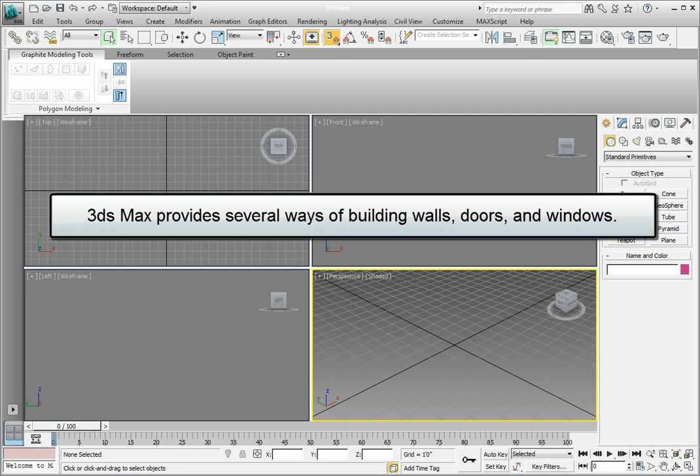3ds Max offers a variety of ways to build architectural objects like walls, doors, and windows. You can build them using traditional modeling techniques, like building from polygons using the graphite modeling tools. Polygon editing is a great way to work if you're building customized walls, doors, or windows.

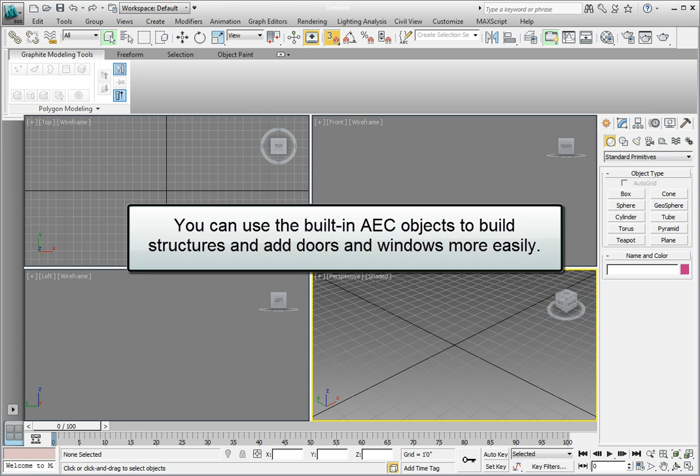However, you can use the built-in AEC objects to build structures and add doors and windows more easily. In this lesson, we're going to take an existing foundation and build a very simple structure using the built-in walls. Then we'll add a door and several windows.

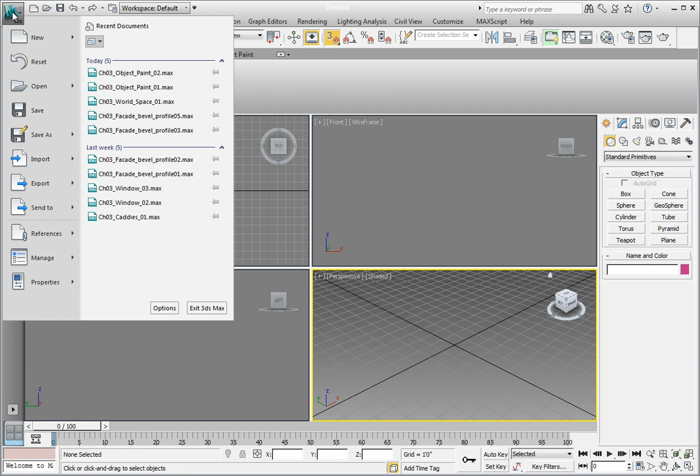Click the Application button. From the Application drop-down menu, click Open. Navigate to the Chapter 3 subdirectory and open the file Ch03_AEC_Construct_01.max. You're looking at the concrete pad that we're going to use to build our structure on.

You'll notice that there's also a grid placed on the surface of the concrete pad. In order to make it easier to draw on the surface of the pad, we're going to activate the grid so that our coordinate system matches the top of the house's foundation.

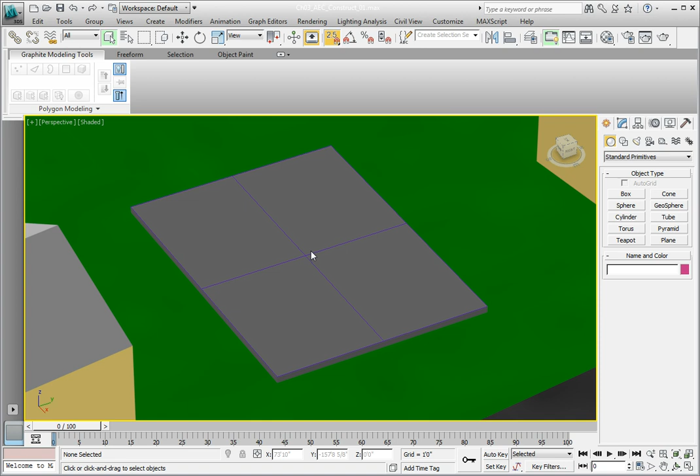In the viewport, click on the Grid 001 object to select it. After you've selected it, right-click. From the Tools quad menu, choose the Activate Grid option. This activates the selected grid, and we can now more easily build on the surface of the pad.

Click on the green background object to deselect the grid. Don't worry about selecting the background object. The object itself is frozen and is not selectable.

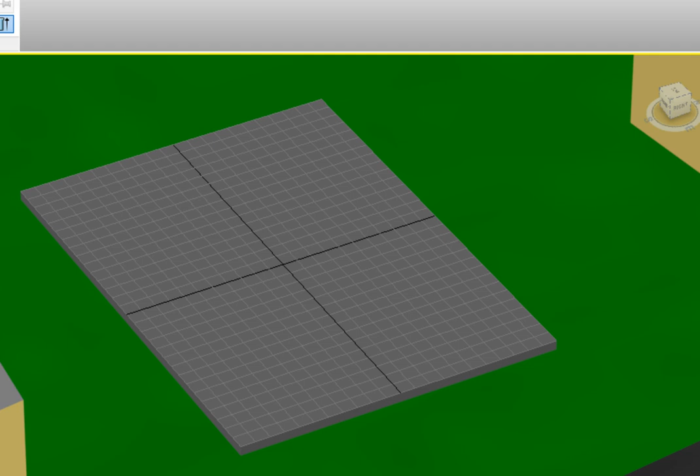On the Command panel, make sure you're working in the Create panel. Make sure Geometry is the selected option. From the Geometry drop-down menu, choose the AEC Extended option. You'll notice several objects we can create. We're going to use the Wall object. Click on the Wall object in the Create panel.

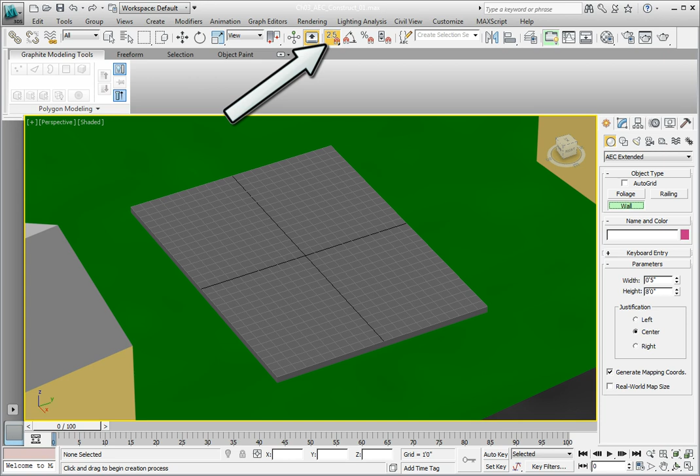We want to use the Grid Snap in order to more easily place the corners of our walls. To activate the Grid Snap, we can use the Snap Toggle button in the main toolbar. In the main toolbar, click and hold the Snap Toggle button and choose the 2.5-dimensional option from the flyout.

Next, we need to ensure that we're snapping only to the grid points. Right-click over the 2.5D Snap Toggle button in the main toolbar. This will open the Grid and Snap Settings dialog.

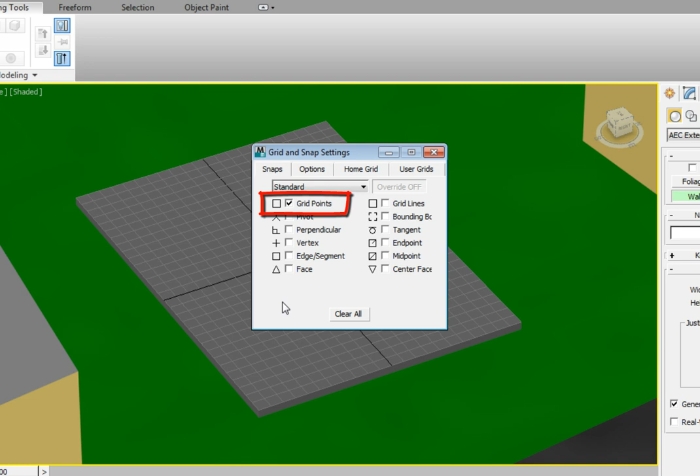Double-check that only the grid points checkbox has been checked. If there's any other configuration in your Grid and Snap Settings dialog, uncheck any snap options and make sure Grid Points is checked. Go ahead and close the Grid and Snap Settings dialog.

With Snap turned on, as we move our mouse around the scene, we should notice an indicator showing where we're snapping. Before we begin placing our walls, let's set the width and height so the walls we build will be the desired thickness and the desired height.

In the Create panel, Walls Parameter Rollout, change the width value to 6 inches by typing 6 and the inch symbol into the width value entry box and then press Enter. In the height value entry box, change the height to 12 feet by typing 12 and then the foot symbol and then press Enter.

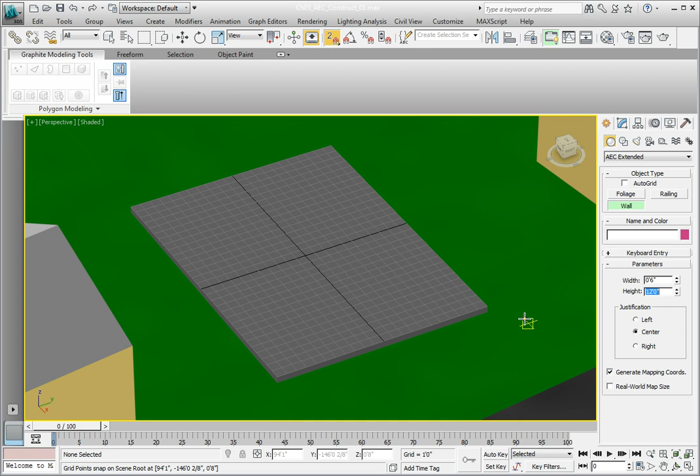This will build a wall that's 12 feet tall and 6 inches thick. In the viewport, click on the lower right-hand corner of the slab to place the first point of the wall. As we move the mouse to our second point, you'll see the wall being built. Click on the upper right corner of the slab to place the second corner of the wall.

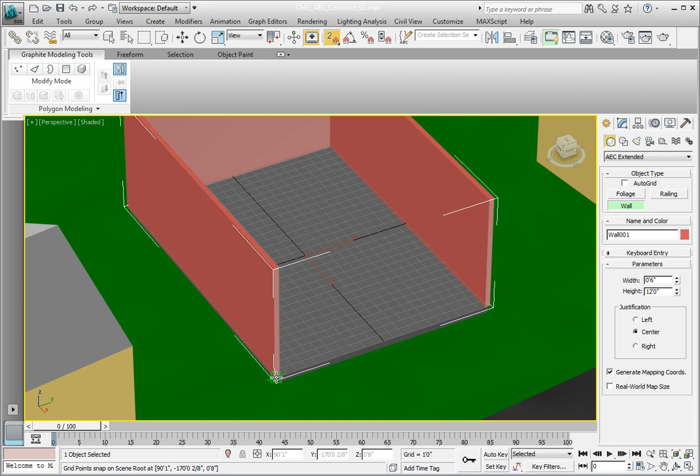Then click on the upper left corner of the slab to place the third corner. Then click on the lower left corner of the slab. This places our fourth corner. Then we'll click again on the starting point in the lower right-hand corner of the slab.

A dialog opens that asks us whether or not we want to weld these points. Click Yes to weld the points. Then right-click twice to finish the wall and get out of wall creation.

There's still one problem you'll notice. The wall overhangs our slab a little bit. In order to fix this, we need to change the justification of the wall itself.

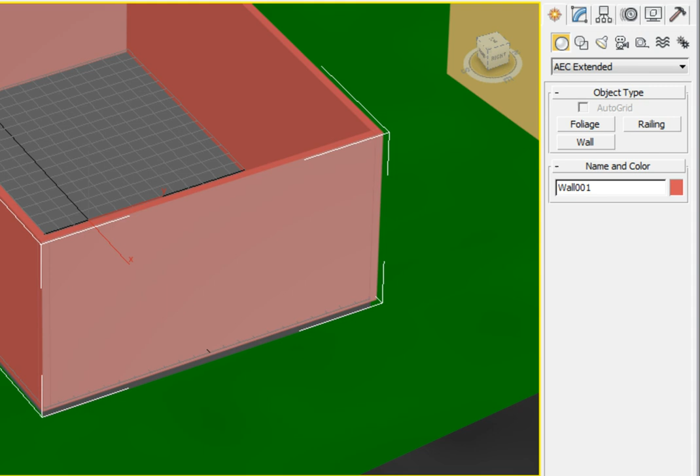In the Command panel, click on the Modify tab. In the Wall's Edit Object Rollout, set the justification to Right Justification. That will cause the walls to be justified properly in relationship to the slab.

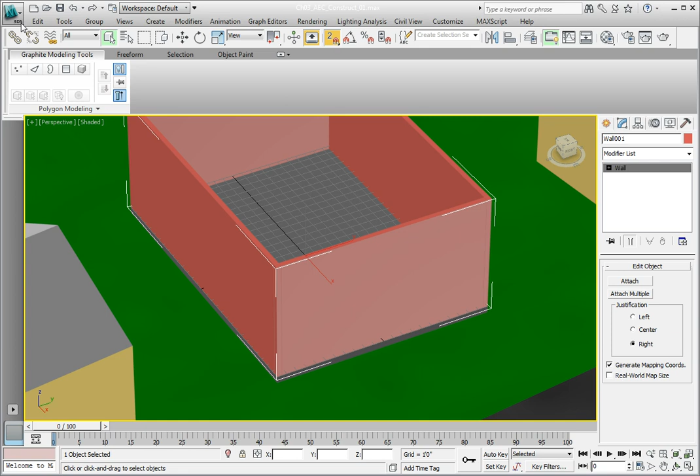Now that we've completed adding our walls, click on the Application button. From the Application menu, click Save As. In the Save As dialog, click the Increment on Save button to save this file as a new file with an incremental file name. If you're asked to overwrite a file, go ahead and overwrite it.